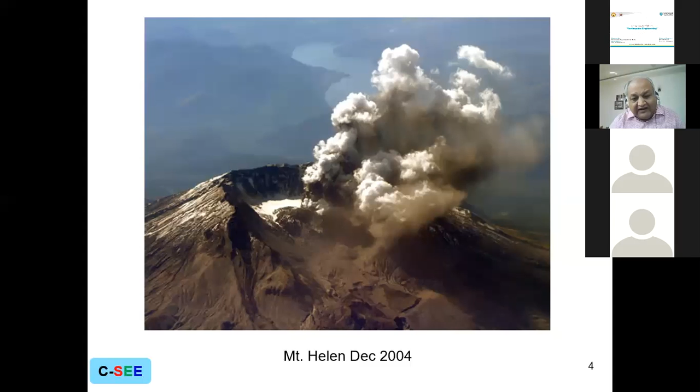Now the question arises: how do we carry out the design of buildings to resist earthquakes? Of course, we can't stop the earthquake from occurring, but we can certainly take precautions so that our buildings remain safe and the people inside the building are also safe.

There are essentially two types of design philosophy. One is the prescriptive design, which we have been following for several decades, and the new philosophy called performance-based design. These two philosophies are two opposite poles, North Pole and South Pole. In performance-based design, the code only specifies an acceptable level of protection against structural failure under extreme load, and how to achieve it is left to the designer. In prescriptive design, the code specifies what to do and what not to do.

For example, what should be the minimum size of the column, what should be the minimum size of the beam, what is the minimum reinforcement in a column, what is the maximum reinforcement, minimum spacing of reinforcement, maximum spacing of reinforcement, and so on.

So everything is prescriptive. It specifies what exactly you have to do, what you are not supposed to do. The problem with the prescriptive design is it may be either oversafe or sometimes undersafe. But you have less responsibility because you are following the code, and the code says do this, do this, do this, and don't do this, don't do this, don't do this. So the entire responsibility lies with the code in this case.

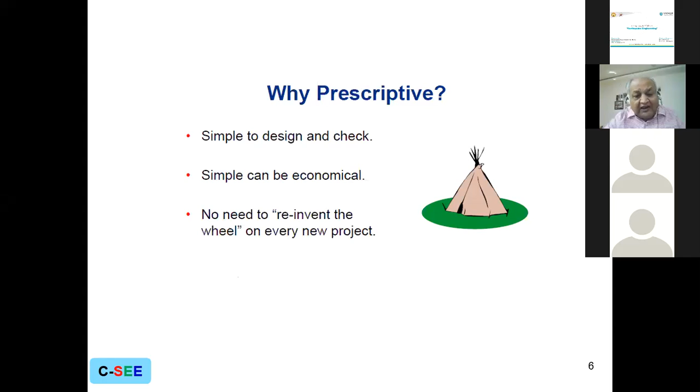What is the problem with the prescriptive design? The problem is it leads to loss of rationale and loss of ability to improve upon it. Loss of innovation leads to loss of economy, and loss of rationale can also lead to loss of compliance.

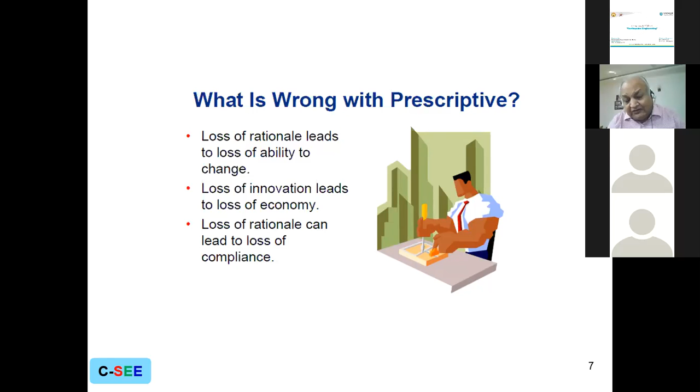Because nowadays, especially if you look at the current IS 1893 earthquake code, part 1, as well as 13920, there are many clauses which are very difficult to understand, very difficult to follow, and therefore there is a loss of compliance. So people have developed their own understanding, saying we'll do it like this, and they go ahead with it, and it is approved, knowing fully well that it does not really comply with these codal requirements. But what to do? If the codal clauses are irrational, you have no option.

Now, performance-based codes. ACI 318 code and the Eurocode 2 are quite close to performance-based code, but not exactly. Now, what is involved in a performance-based code? There are three parameters which you have to understand.

One is the performance index. The code is supposed to specify a performance index, and then how to verify the performance and how to evaluate the performance. So these are the issues. That's why the performance-based codes are not fully available even today. They are in the conceptual stage, quite advanced, but not fully available so that people can use it in the real sense.

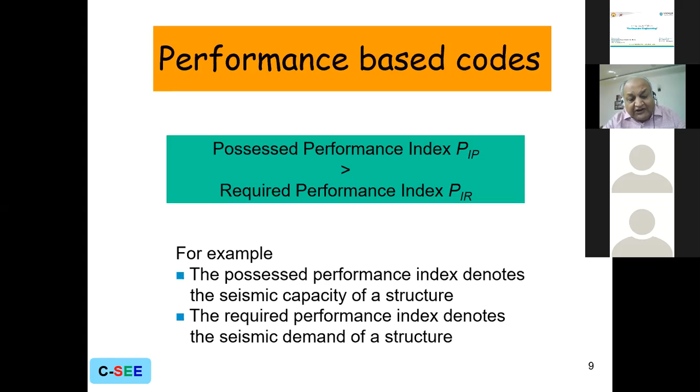In a performance-based code, it is important that the possessed performance of the building should be more than the required performance of the building. It's called required performance index, PIR, and possessed performance index, PIP. For example, the possessed performance index denotes what is the seismic capacity of a structure, and the required performance index denotes what is the seismic demand of a structure.

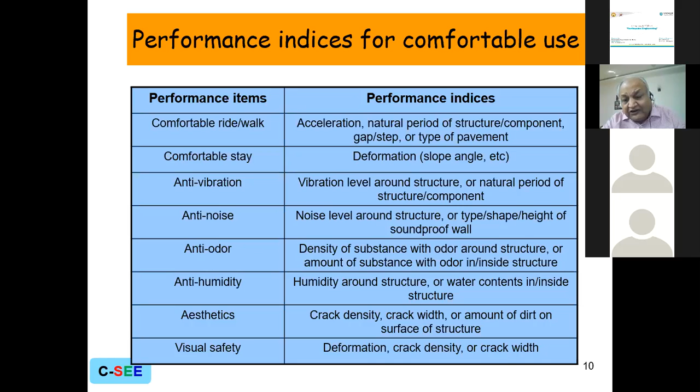Performance items: comfortable ride, walk, comfortable stay, anti-vibrations, anti-noise, anti-odor, anti-humidity, and on the right hand side in this table I have shown performance indices. For a comfortable ride or walk, acceleration and natural period of the structure component have to be under control. For comfortable stay, lateral deformations or story drift should be under control. Similarly, all the parameters are specified.

Now there is another limit state called damage control limit state. In a damage control limit state, damages to plastic hinge members are within the repairable limit. Non-hinge members do not yield, and members do not fail in shear. If you don't want a brittle failure, everybody knows that a shear failure is a brittle failure.

So we don't want shear failure. We want that the failure should be a flexure failure, and the members are not supposed to develop plastic hinge. That is, non-hinge members should not yield, meaning they should remain elastic throughout.

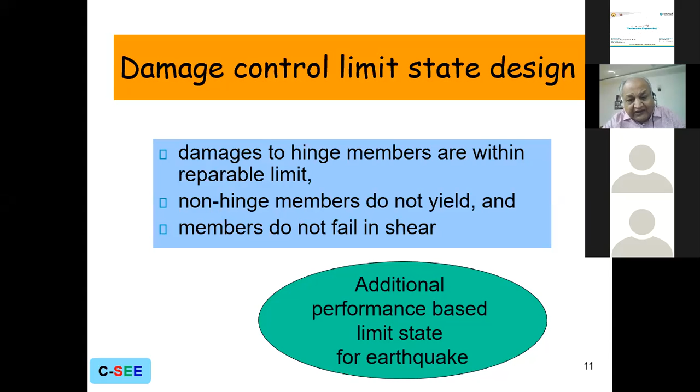What is wrong with the performance standards? Quantitative criteria are sometimes difficult to develop, and often difficult to achieve consensus. If there are two different designers talking about the performance standards, they may have two different views. Then evaluation—how to evaluate the performance—that is the biggest question.

Measurement is the key. How to measure the performance? It is essential to find a way to measure analytically or experimentally a meaningful quantity. What is the design criteria? The design criteria is that the structure must be able to resist all expected and probable loads on the structure safely during its entire design life.

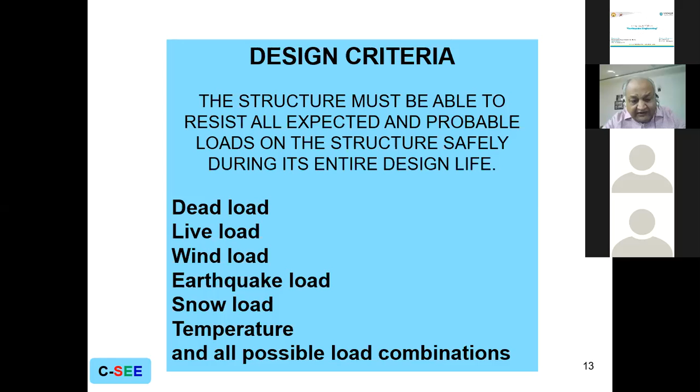Various loads I have specified here and the combinations. The present approach is to carry out elastic analysis and magnify the member forces by partial safety factors to get the forces at collapse. So you carry out elastic analysis and get the bending moment, shear force, etc., and from there you get the factored bending moment, factored shear force by multiplying by some load factor, 1.5 or 1.2 or something else. What does it mean physically? It means physically that the entire building is going to plastify simultaneously.

Because you are taking the entire building to plastic hinge by a single factor, 1.5 or 1.2, it means simultaneous plastic hinging in the entire structure, which is a highly improbable situation. That is the flaw with it.

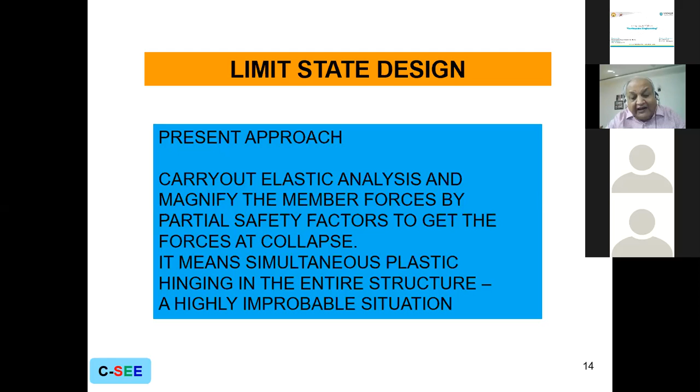Whereas what the code is saying is that you take the elastic forces and multiply by certain factors. That means all the hinges in the entire building, red color and yellow color, form simultaneously, and then the building may collapse or remain elastic depending upon the level of the lateral forces.

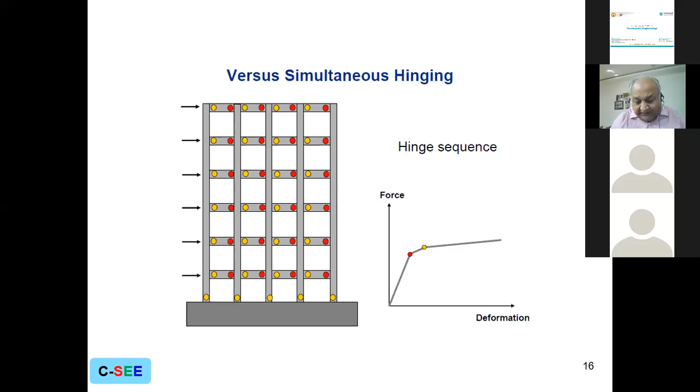The problem is that to tell the common designer or an average designer how to do this distributed plastic hinging, for which he has to carry out a non-linear analysis, would be very, very difficult because the maturity of the average designer is not that much, not only in India, but even in Western countries like Europe and America. So it's a universal problem right now, and that's why everybody is following the simultaneous hinging approach rather than the distributed plastic hinging approach.

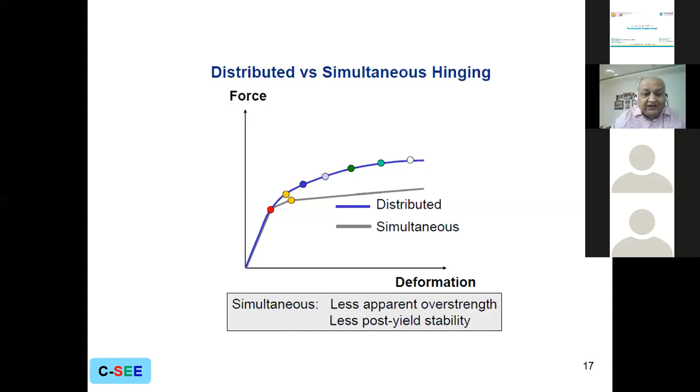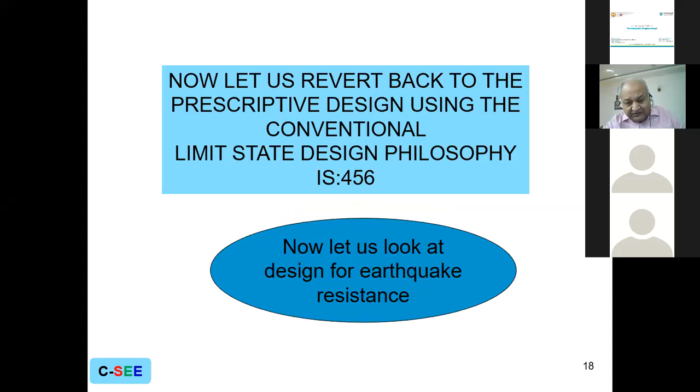Now let us revert back to the prescriptive design using the conventional limit state design philosophy as specified in our IS 456 code. Now let's look at the design for earthquake resistance.

What is the design philosophy? We try to divide earthquakes qualitatively into three categories: minor earthquake, moderate earthquake, and severe earthquake. In a minor earthquake, non-structural damage will occur to the building. In a moderate earthquake, which may occur once in 20 or 30 years, there may be minor structural damage which can be easily repaired. Severe earthquakes occur once in the lifetime of the building, maybe once in 100 or 200 years, and there may be major damage, but the building frame should not collapse.

The intention here is that let there be damage to the building, so we don't care about the building, but we do care about the people occupying it, and they should come out safely. So that is the design philosophy for earthquake resistant design.

Now, those who have seen the latest 2016 code, they have removed this design philosophy from the preface. I don't agree with this, why they have removed it. I don't know why, but they shouldn't have done it, because this is still a widely accepted worldwide design philosophy for earthquake resistant design.

There are three kinds of earthquakes qualitatively: small, moderate, and large. In a small earthquake, the controlling factor is deflections, provided by enough stiffness in the building. In a moderate earthquake, where there can be only minor structural damage, the controlling parameter is strength of the members. In a large catastrophic earthquake, where we want that there should not be any collapse causing loss of life, we allow the structure to enter the inelastic range and absorb energy by providing ductility. So in a small earthquake, the controlling parameter is stiffness; in a moderate earthquake, it is strength; and in a large earthquake, it is ductility.

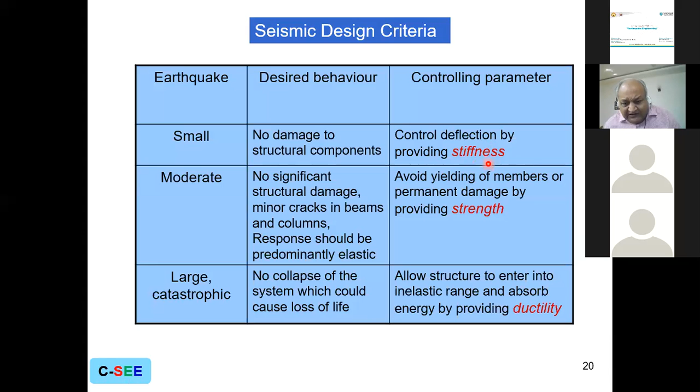So this is stiffness, this is strength, and this is ductility.

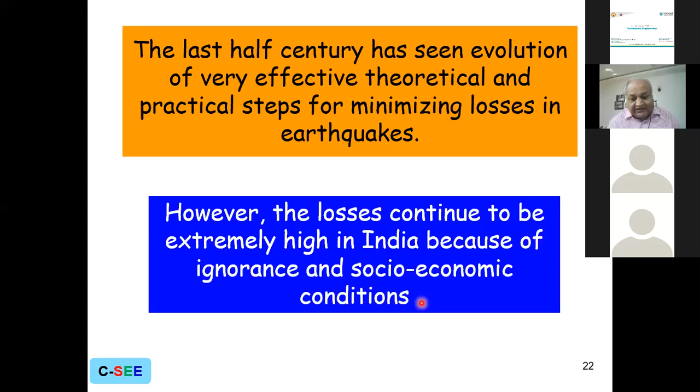The last half century has seen the evolution of very effective theoretical and practical steps for minimizing losses in earthquakes. However, losses continue to be extremely high in India because of ignorance and socio-economic conditions. What does this mean? The maximum losses occur in remote areas of the country where traditional stone masonry and poor construction practices are prevalent.

In the past, in hilly areas, timber or bamboo framed buildings were built, minimizing losses. That was the practice developed by our ancestors. However, deforestation and socio-economic factors changed the building materials, design practices, and construction practices, leading to greater losses.

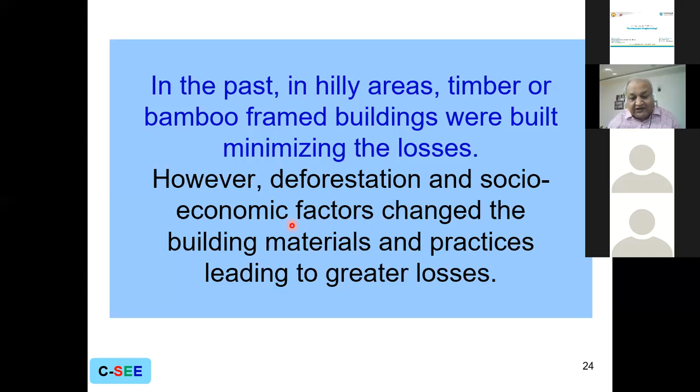Now everybody wants a pakka house. They think that if somebody lives in a timber or bamboo house, they are very poor and don't get social standing. Therefore they are forced to switch to masonry or RCC buildings, which are much more vulnerable to earthquakes than these lightweight buildings.

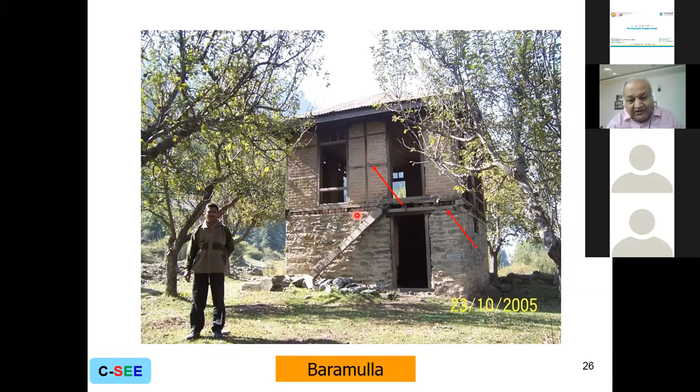They provided beautiful wooden trusses with all the members interconnected so that the building remains safe during an earthquake. This photograph is again taken from Baramulla.

Now you can see our latest buildings, or huts, in the hills. This is stone masonry with no bond; they are not even using mortar because they are so poor, they can't afford it. Look at the roof—it's built of slate, a very heavy material. If an earthquake occurs, because there is no bond, these walls will fail and collapse, and the roof will fall on the people inside the hut. That is the reason why, because of the lack of bond and interlocking, when there is an earthquake in the hills, you always read about high casualties. These are the buildings causing that casualty.

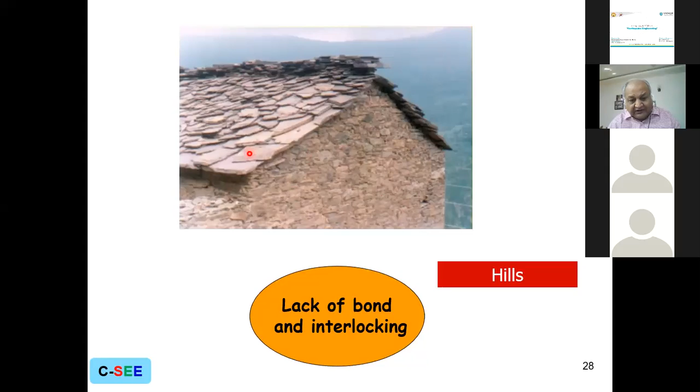Let us look at some of the typical damages during earthquakes all over the world.

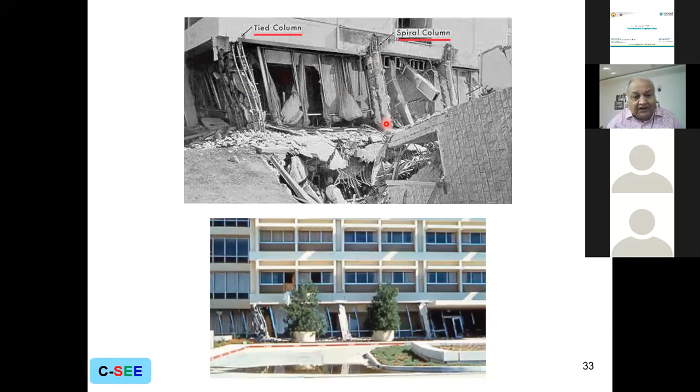This was the first floor, which has gone down. So this was the open story, and this is the elevation of this same open story. This frame has gone down, and you can see here somehow by accident this column happened to be a tied column, and the inner column happened to have a spiral column. There is no reason why one was made a spiral column and the other a tied column with lateral ties. But during this earthquake, the tied column is badly damaged, whereas the column with spiral reinforcement is intact. So in a single building, this is a very beautiful slide which shows that the behavior of a spiral column is very good during an earthquake as compared to that of a tied column.

This is a failure in a building in 1999 in Taiwan, the soft story failure. This building collapsed on the adjoining building. The adjoining building was all right, but because of the earthquake and soft story, this building collapsed on the other building, so both buildings are gone.

Another building from the same 1999 Taiwan earthquake - I can see here in the middle bay, all the beams have failed. It is a beam-column joint failure. Otherwise the whole building is intact, but because of this beam-column joint failure, the entire building is gone. It has to be demolished.

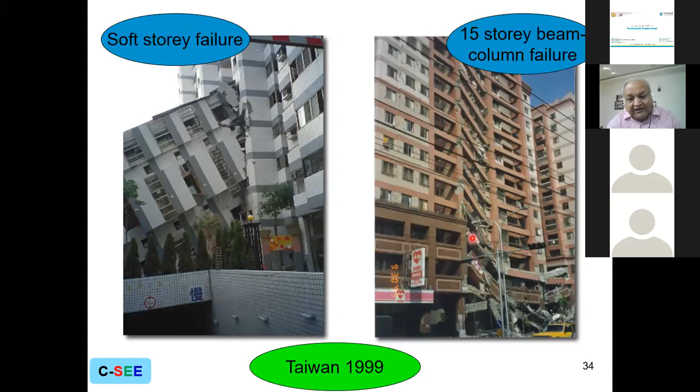Torsion in buildings is a single factor responsible for collapse of almost 90% of buildings all over the world. Torsion means our building is irregular. If you look at the classification given in IS 1893 Part 1, all buildings which are irregular, either in plan or elevation or both, introduce torsion in the building and are responsible for the collapse.

How are they responsible? The purpose of torsion is to increase the forces in the building, and the increase in lateral force is not much, about 15 to 20% only. So most people, because the architect wants an unsymmetrical building, say okay go ahead with the unsymmetrical or irregular building, and I will provide additional forces of 20% or 25%, and think that the building will be safe. That's a very, very wrong concept.

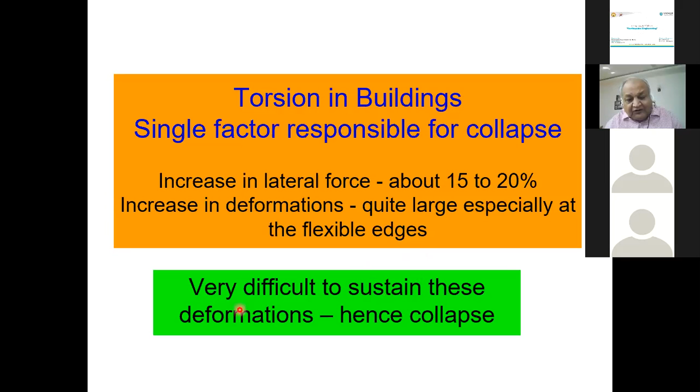In torsion, the increase in lateral force is not critical. What is critical is the increase in deformations, in deformations in concrete. You have concrete columns and beams everywhere, and because of torsion there is an increase in lateral strain in the columns and beams, and concrete cannot bear that kind of strain. Once the strain exceeds the permissible limit in concrete - more than 0.35% - as soon as that limit is exceeded, the building will collapse. It's very difficult to sustain these high deformations, that's why there is a collapse.

This is again a building from Gujarat, Ahmedabad - or Bhuj - and you can see here that only the lift core remains and everything else has gone down. This is because of the torsion in the building.

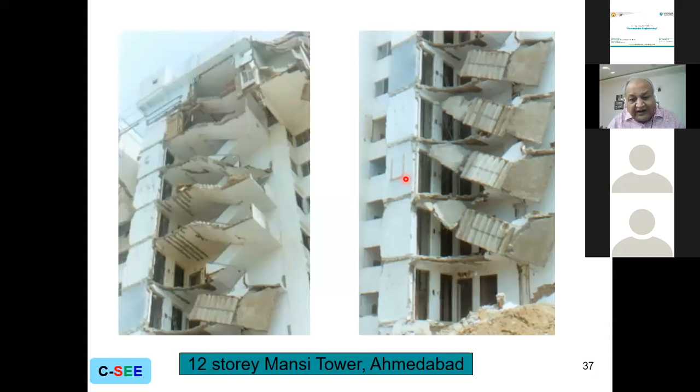This is Mansi Tower - the adjoining block collapsed, and look at what happened to the staircase. Again, torsion and soft story in this particular building from the Gujarat earthquake. Same building again - you can see clearly there is a torsional mode.

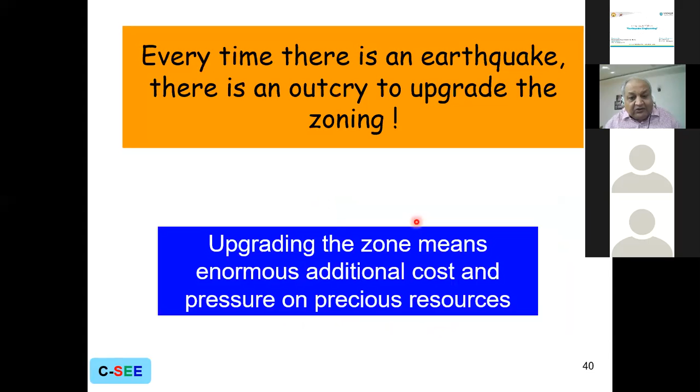What happens is that every time there is an earthquake, there is an outcry to upgrade the seismic zone. This is what happened after the Gujarat earthquake - Zone 2 in Bombay was increased to Zone 3, and Zone 1 was increased to Zone 2. There was no logic why these zones should have been increased. Upgrading the zone means enormous additional cost and pressure on the precious resources of the country, and it doesn't solve the problem because the problem lies somewhere else. Upgrading the zone is not a solution.

What is the solution? The solution is better planning, appropriate material, workmanship, and detailing. That's what is required - that means more pressure on the designer so that they are more careful in how to design the building. The key is to provide continuity, redundancy, and ductility in the building.

You have to provide ductility so that you have reserved energy in the structure. Projections and suspended parts should be minimized because they increase vulnerability to vertical accelerations.

You have to be careful about the non-structural elements and foundation, which should be interconnected. Use raft foundation or piles, and make sure you have the tie beam connecting all the pile caps.

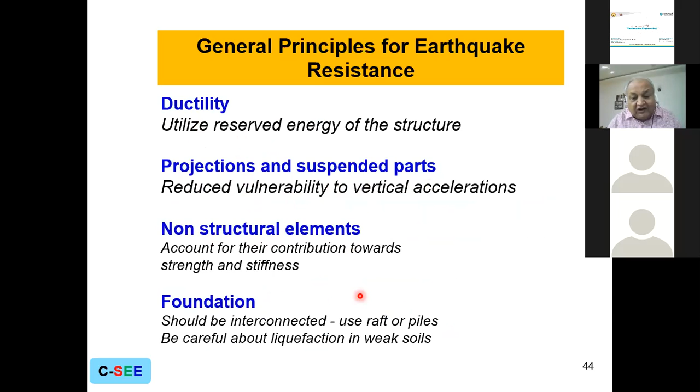So what is the objective of IS 1893 code? To provide lateral forces for earthquake depending upon the seismicity of the area, characteristics of the structural system, materials, etc.

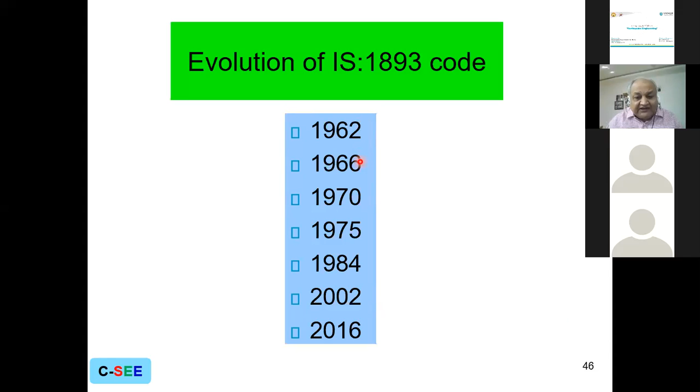Now, how do you analyze the building? There's the seismic coefficient method, the response spectrum method or dynamic/modal analysis, and time history analysis, which is the third method. We mostly use either the first or second, but time history method is still not included in the IS 1893 code.

That's where I have a problem with pushover analysis as well as other non-linear time history analysis. If the code even today is not able to specify how to carry out linear elastic time history analysis, and they have not incorporated it fully in IS 1893, yet now they are talking about pushover analysis or other nonlinear methods or energy absorbing techniques. So I don't know how they go together.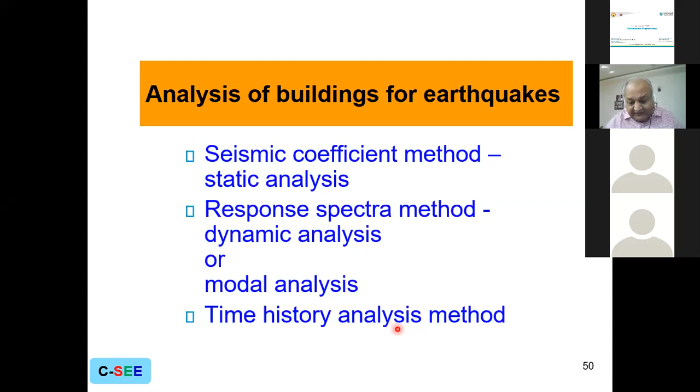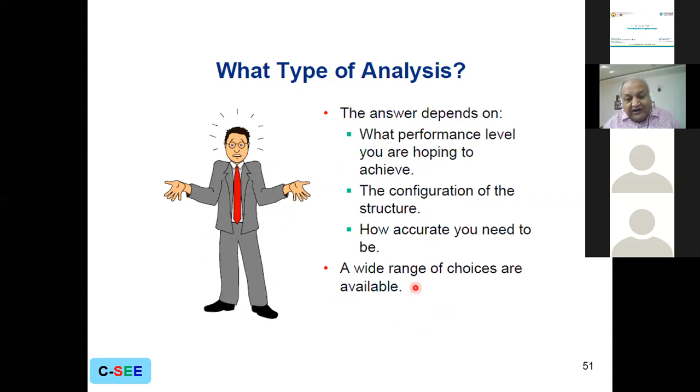The question arises: out of these three analyses, which should I carry out? The answer depends upon what performance level you are going to achieve, the configuration of the structure, how accurate you need to be, and a wide range of choices are available.

It is a single degree of freedom system. If we reduce our multi-story building to an equivalent single degree of freedom system, this is a portal frame related to lateral displacement. This is another mathematical model with mass, damper, stiffness, resting on frictionless wheels so it can move back and forth. This is approximate modeling, and this is the equation of motion.

m times x double dot plus c times x dot plus k times x is equal to minus m times y double dot, where y double dot is the ground acceleration.

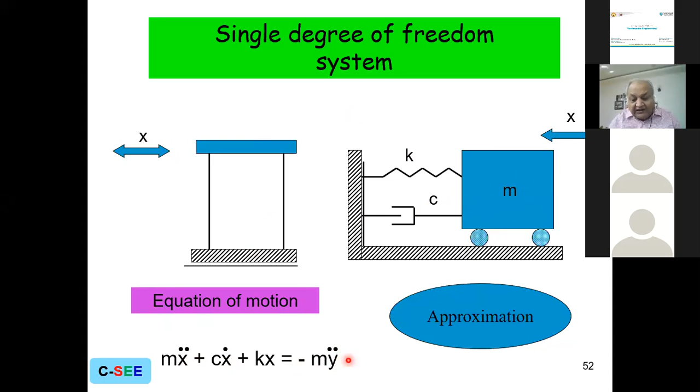So the response of a single degree of freedom system, having a given natural period of vibration or natural frequency and viscous damping, we need to calculate the absolute maximum displacement, velocity or acceleration when subjected to a given ground acceleration.

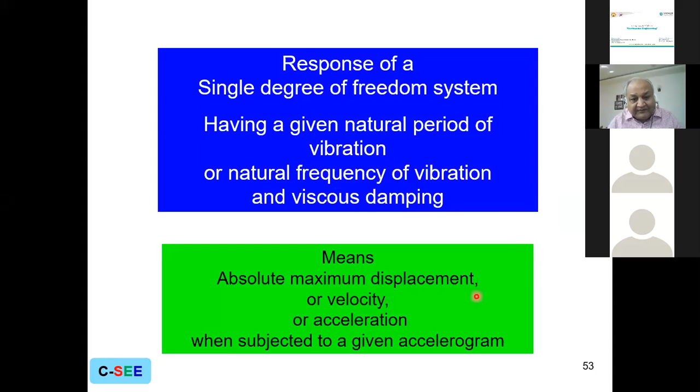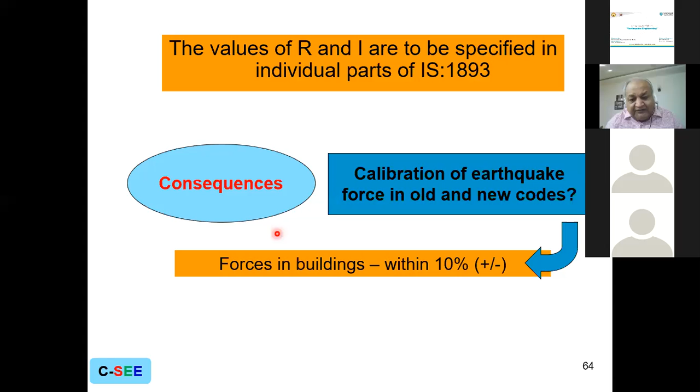So these are the consequences. Calibration of the earthquake force in the old and new earthquake code. I will skip this part.

Now, where is the point of application of the earthquake force? You have a building, so at what point does the earthquake force act on the building? The earthquake force acts through the center of mass at each floor. So you have a static force you apply through the center of mass at each floor.

The eccentricity of the applied force is given by the following equations given in the earthquake code. There are 2 sets of equations, EDA and EDB. ED means design eccentricity, so design eccentricity A and design eccentricity B. The formula for A is 1.5 times E plus 0.05 B, and the other one is E minus 0.05 B.

So what is the physical significance of these 2 equations? In a building, on any floor, one side may be more rigid as compared to the other side. So we say the rigid side, and equation 1 governs the rigid side of the building, whereas equation 2 governs the flexible side of the building. What does it mean actually? How does it govern? Let's understand what is E.

E is the eccentricity between the center of rigidity and center of mass at each floor. CR is center of rigidity and Cm is center of mass. There is another definition of eccentricity: it is the eccentricity between the shear center and cumulative center of mass at each story. And what is B? B is the width right angle to the direction of the earthquake, the width of the building. The factor 1.5 represents dynamic amplification factor and the factor 0.05 represents extent of accidental eccentricity. I hope this part is very clear.

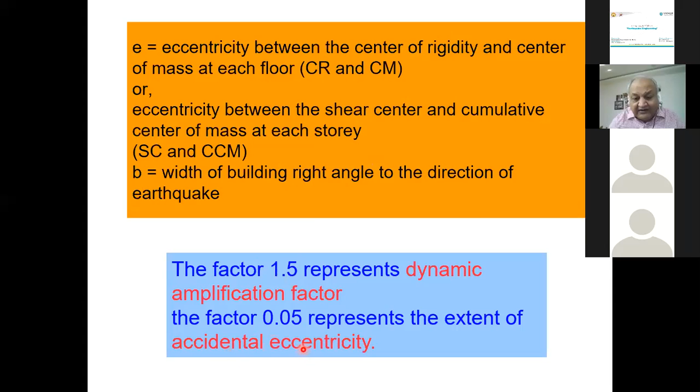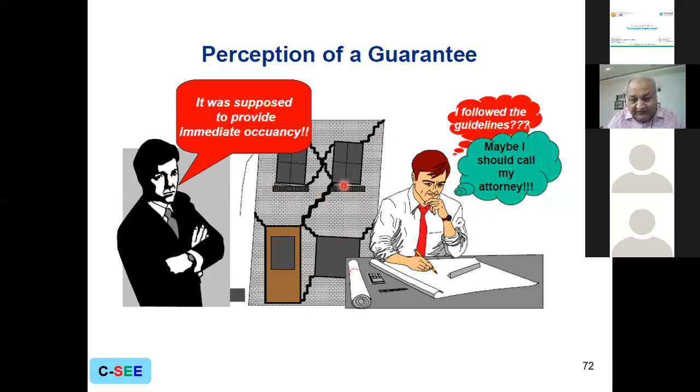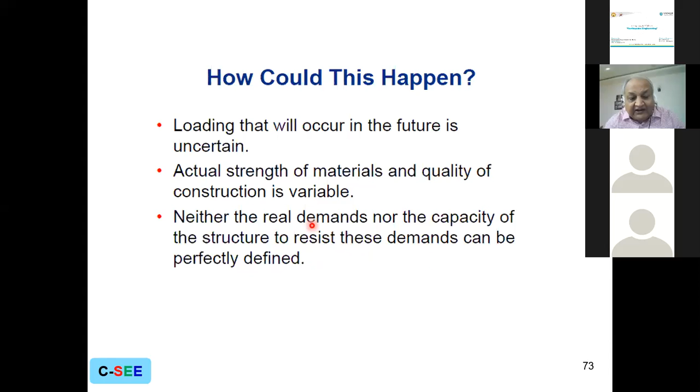How could this happen? The loading that will occur in the future is uncertain. The actual strength of materials and quality of construction is variable. Neither the real demands nor the capacity of the structure to resist these demands can be perfectly or accurately defined. Earthquake force is a highly unpredictable, unknown force due to lack of data, depending on magnitude, frequency content, duration, and peak ground acceleration.

Now let's look at the detailing of the reinforcement aspect. What is the philosophy of detailing of reinforcement? Ductile failure, that is flexure failure, is desirable. Out of the two failures, we divide them into two categories: shear failure and flexure failure. Shear failure is a brittle failure - it fails suddenly, gives no warning, and therefore must be avoided. Flexure failure is preferred, although we don't want any failure at all. But if there has to be a failure, let it be flexure rather than shear - a ductile failure, which is desirable because it gives sufficient warning to take corrective actions in the building.

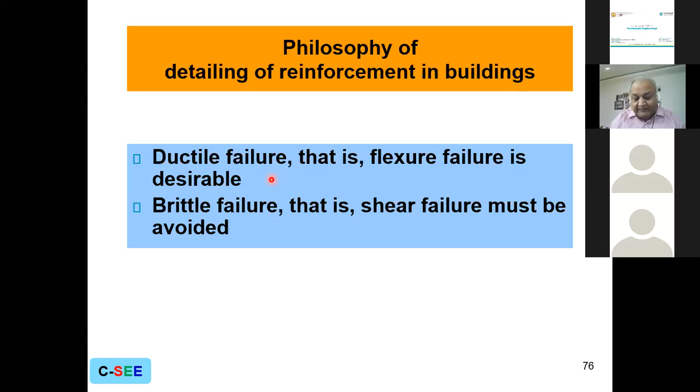What is the option of the designer? Depend heavily on the reserve strength, that is nonlinear energy, that is ductility. For that, I have to consult IS 13920-2016 code. Let me give you a conceptual idea about ductility.

This only means it may become very expensive because I am designing my building for the maximum possible earthquake force in its life, which may occur, which may not occur. I am designing for a higher force - I am increasing my cost with the so-called advantage that it won't fail, it will remain elastic throughout.

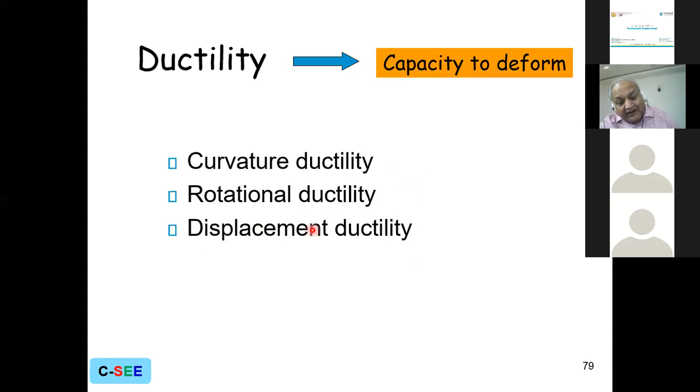I have carried out a lot of nonlinear analysis in buildings, and I find it is difficult to achieve even a displacement ductility of 3, because the structure fails, it collapses.

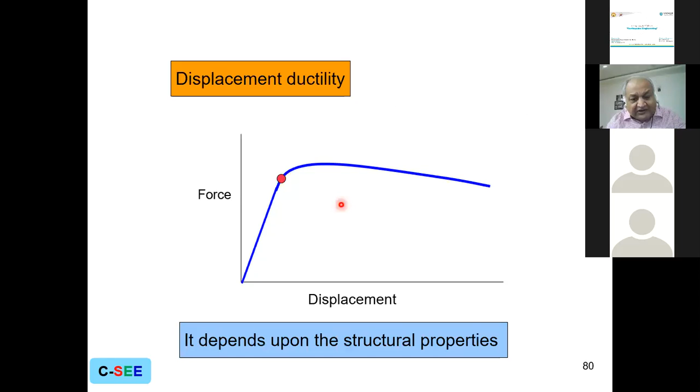In India, if you see, almost one building collapses somewhere in the country, maybe Delhi. There are so many cases happening, reported on TV almost every day, in spite of so much advancement, so much material technology advancement, so much computer modeling, and so on.

We are supposed to refer to these codes for the detailed detailing, and don't forget this IS 456 code, which has to be followed. So you have to satisfy all these requirements, this code and this code.

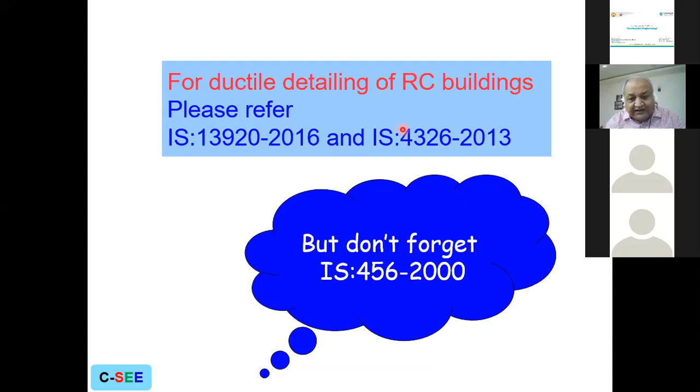Now, what is the idea of detailing of reinforcement in different elements? The idea is to provide confinement of reinforcement, because the concrete is in a triaxial situation, that is, it is being confined from all directions. There is an increase in its ultimate strain or the failure strain.

That's called capacity design. In capacity design, you have to identify the probable locations of plastic hinge in all the structural elements, and then make sure that the hinge will form only at that location and not anywhere else. That's the whole purpose of capacity design - you identify the probable locations of plastic hinges.

How do you define the probable location of plastic hinges? You have to carry out a nonlinear analysis. Now, when you carry out nonlinear analysis, the problem is how do you model your beam? How do you model your column? How do you model the beam-column junction? How do you model the steel? How do you model the reinforcement and so on? How do you model the shear reinforcement? These are questions which are still not answered.

So it is very easy to talk about capacity design. It is very easy to talk about pushover analysis, but there are problems. There are serious issues involved in how to model a building for nonlinear analysis.

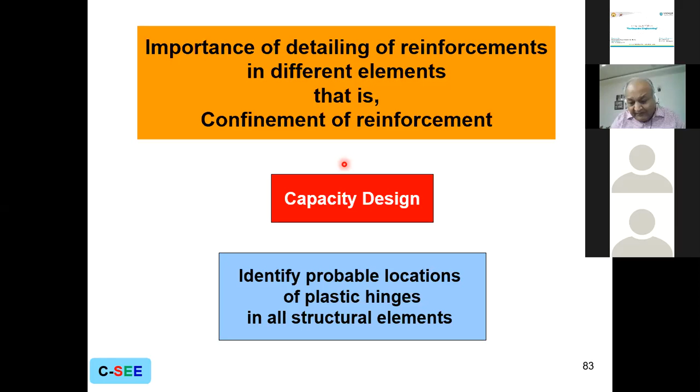So we'll discuss this a little more in the subsequent slides.

A knowledge of the plastic theory is required to understand and appreciate the concept of plastic hinges. As I said, the biggest issue is how to model a building for nonlinear analysis, and that is still open to question. There are several models available and several schools of thinking. Everybody comes up with a different model, and if you change the model slightly, the results are totally different.

So if you change the input parameter slightly and your results are totally different, then how do you trust them? Whom do you trust? And if you can't trust the results, how can you think about carrying out a nonlinear pushover analysis or a design based on nonlinear plastic hinge analysis? So it is good that people are doing nonlinear analysis for academic purposes, but when it comes to real life, we still have a lot of problems.

There are still many issues. How do you make sure that the concrete you have built in real life at site—how do you ensure the quality of that particular concrete? Even today we don't have any foolproof technique to tell us where the honeycombing or segregation is inside the concrete, unless there is a failure.

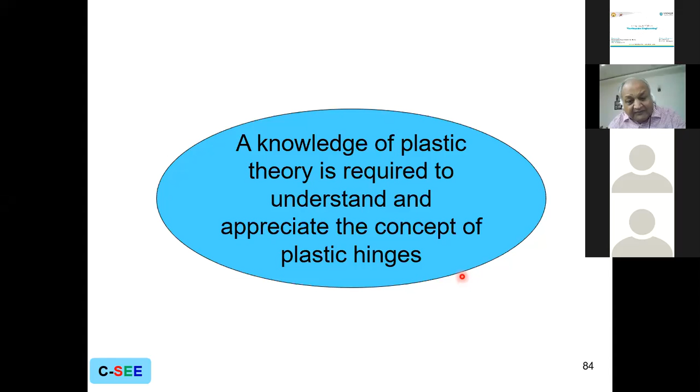Then we talk about strong-column weak-beam proportions. That means at any joint, in both the vertical planes x-x and y-y, the summation of the moment capacities of the columns must be more than at least 20% of the summation of the moment capacity of the girders. Sometimes in the latest code they changed it to 40%.

And I don't know how many of you are aware, in the draft code of the 2016 code, this factor was 1.7. That means the moment capacity of the columns should be 70% more than the moment capacity of the girders.

You know what happens—if you use that kind of value, even with 40%, the column sizes become very, very large, and most architects don't accept it. I am in touch with many designers in the Delhi NCR region and other parts of the country, in Bangalore or Bombay, and there is a complete feedback that architects don't want column sizes to increase that much.

So again, what happens? How do they bypass it? What do they do? They simply don't use this check.

Okay, they are not using this check. Again, there is a problem with the compliance of the codal specifications. People are building their buildings without this clause.

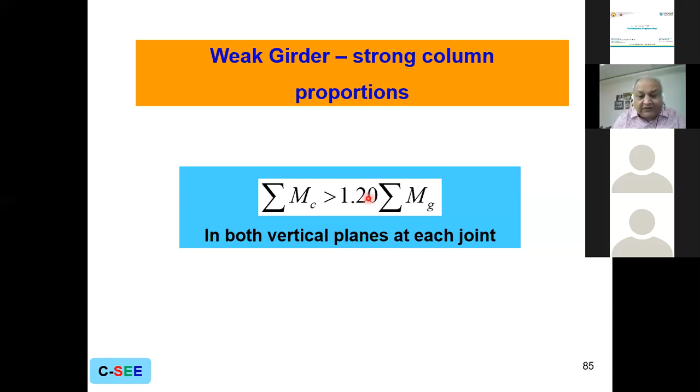Because if you go into panic mode, you increase by 1.2, 1.4, or 1.7 as was proposed in the draft. Just when the code was being finalized, somebody reduced it to 1.4 instead of 1.7. But even 1.4 is very high. That is the reason why people don't want to check this and make the columns bulkier, and they lose the workable space.

Now, concluding remarks. There is approximation in the concept of limit state design as per IS456 code. There is approximation in modeling and analysis of the building. There is approximation in computing design earthquake forces as per 1893 code. We need not be slave to the codes. Therefore, it is all the more necessary to use common sense, good materials, and very good workmanship. This is the key. Common sense, good materials, good workmanship is what is going to save your building from collapse.

Now I tell you, I visited a lot of buildings in Bhuj, around Bhuj, in almost 100-kilometer radius of Bhuj and Ahmedabad, after the 2001 earthquake. And I found that there are many buildings which did not collapse while the adjoining buildings collapsed. So how do you explain this?

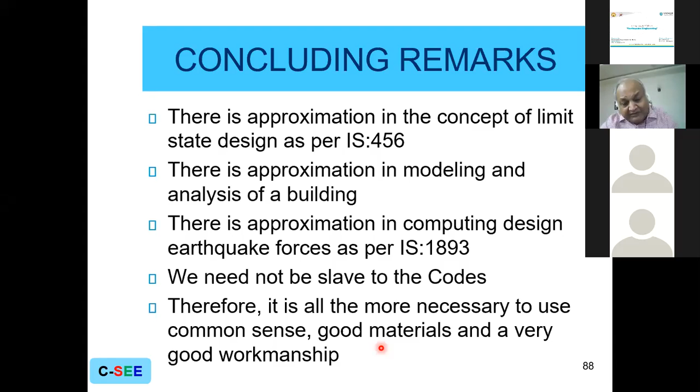Obviously, when we went into the detail, we found that the problem was with the material and workmanship. And that is the reason why those buildings collapsed.

Now, the Indian code writers appear to have a strong belief that the level of seismic hazard in India is same as that in Japan, China, or California in USA. You understand my point here? I'm saying the Indian code writers, especially after the 2002 code, I'm talking about this 2016 code and the revision which is being proposed now, they feel that the level of earthquake hazard in India is same as in Japan, China, or California. That's why with each revision, they keep making it more conservative and expensive.

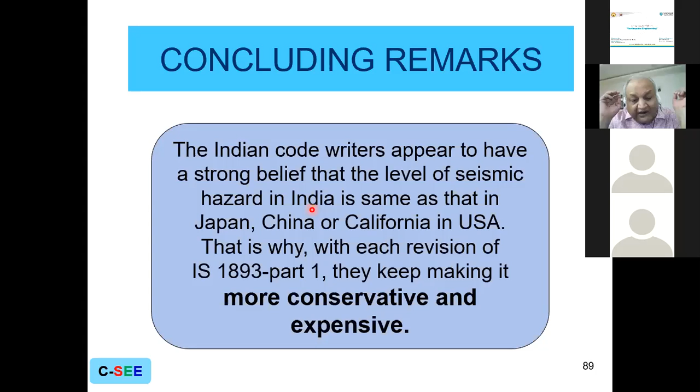How is it possible that the ductile detailing in seismic zone 3, 4, and 5 are identical when the level of hazard is quite different? Why do you have zone 3, 4, and 5? Because in zone 3, we are saying that the earthquake hazard level is very low. In zone 4, the hazard level is a little more. And in zone 5, the earthquake hazard level is even more. If the earthquake hazard level is different in these three zones, how come the ductile detailing is the same in all three?

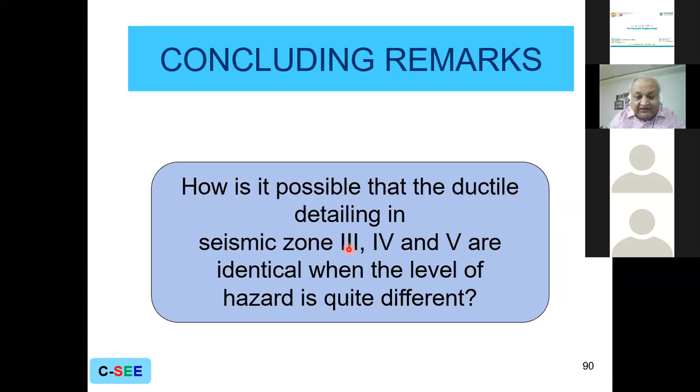In my opinion, the ductile detailing in zone 3 should be much milder as compared to zone 5, and same thing in zone 4. The question is, where is the evidence? Did we have a single failure of a building in zone 3 due to earthquake? No.

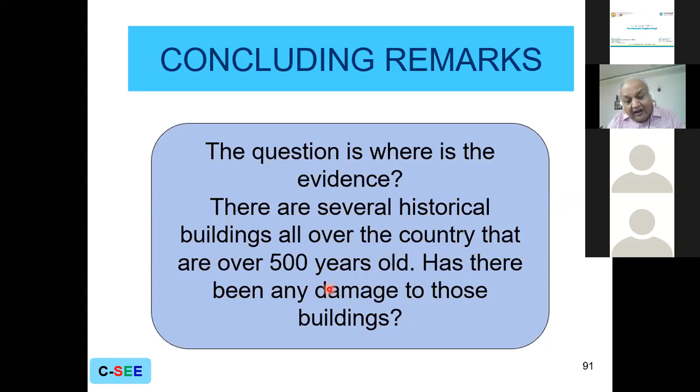There are several historical buildings all over the country that are over 500 years old. Has there been any damage to those buildings? If these buildings are standing for the last 500 years, that means we have only mild earthquakes, we do not have strong earthquakes like those seen in California or Japan and China. So that means there is no need to compare our base years, our activity level with those earthquakes, with those countries.

Our code writers are shy to provide logical commentary behind each and every clause. They should give it, but they are not giving it. The reason? They simply resort to copy, paste, and edit technology. They copy a clause from somewhere, one clause from somewhere else, and they put it together and edit, based on their belief. They think this is the way it should be. But there is no evidence to suggest that this is what is happening.

Another important thing is that the world is moving towards microzonation. I'm sure most of you are familiar with it. So what is microzonation? It means the seismic...

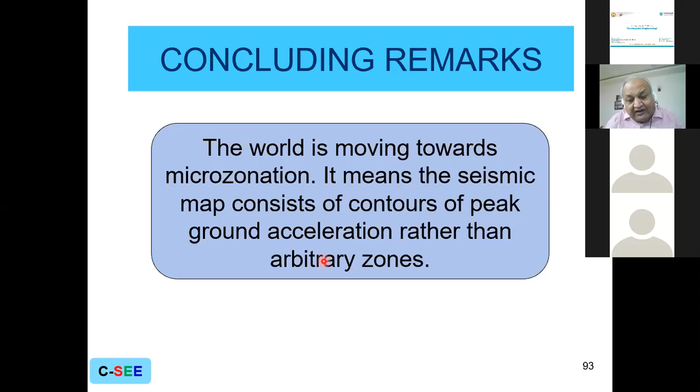In order to develop more logical designs, it is strongly recommended that they develop peak ground acceleration contours and move towards microzonation of the whole country. In that case, we will be able to come up with a more logical earthquake map and design, which will be easier to follow. Let's hope that one day our code part 1 will also have contours so that our design becomes more rational and economical. My advice to my students is they should think about every clause, and keep on thinking.

You should keep on thinking. The more you meditate, the closer you are to the truth, because there are many clauses which are very difficult to understand. The one way of understanding those clauses is that you think and think. So structural engineering is akin to yoga, where you keep on meditating till you understand the truth. Thank you so much.

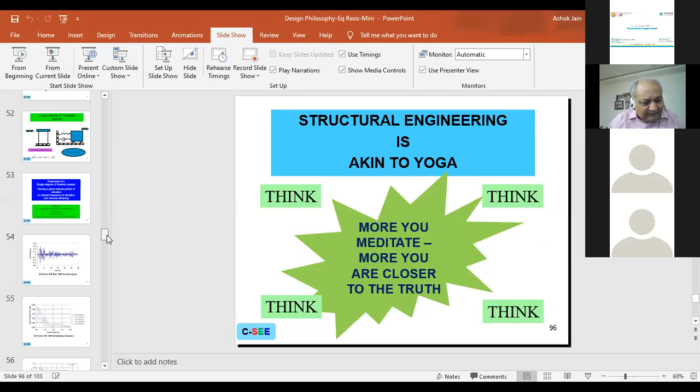Can you see my slide? Can you see my screen, please? Yes sir, it is visible. Okay, so what I'm showing here is this.

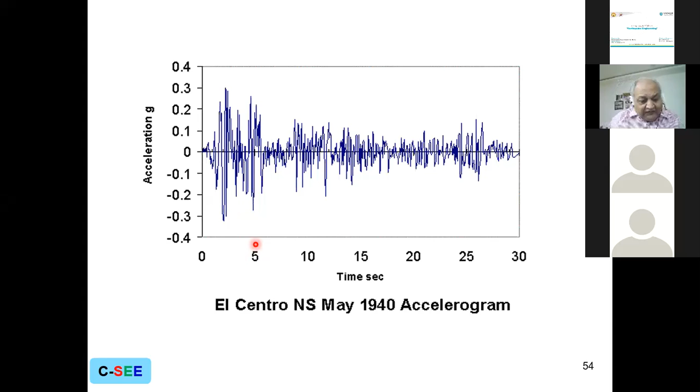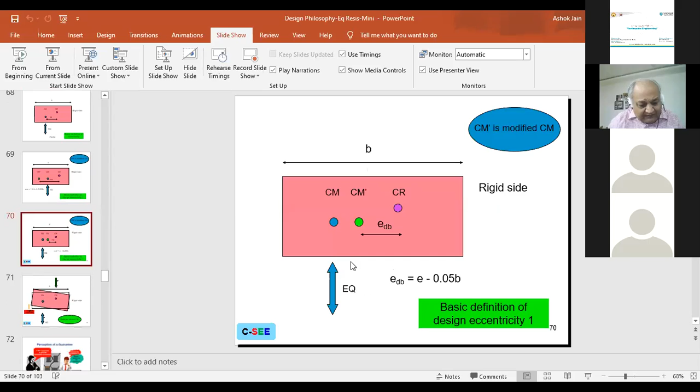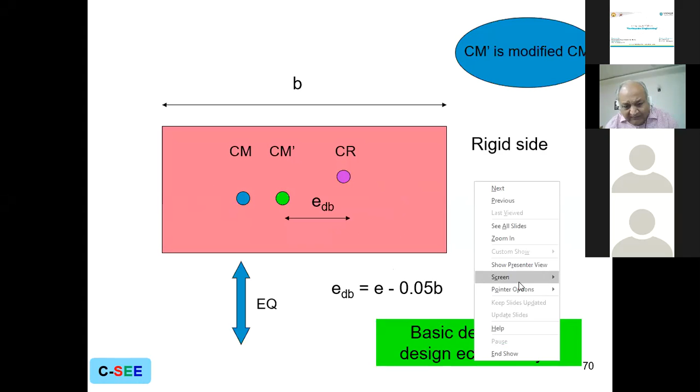If you see my discussion which I mentioned about this one, okay, so here is the center of mass, here is the center of rigidity. This is the actual, as per your calculation, center of rigidity, and here is the center of mass. Now whether you have mass eccentricity, or uneven mass distribution, or flexible diaphragm, it doesn't matter. Effectively, you have to calculate what is the center of mass on a given floor and what is the center of rigidity on that floor.

So whatever may be the cause of this irregularity, ultimately you need to calculate the location of center of mass and center of rigidity, and then use those two equations, EDA and EDB, which I told you. This is the actual center of mass and this is the modified center of mass because of equation EDB. So EDB is basically the distance between CM prime and CR. This is EDB. CR remains constant, it doesn't change, only the CM changes because of this equation.

This is EDA and this is EDB. So CR remains where it was originally, because CR is the center of rigidity of the building which does not change, cannot change. It's only the apparent mass which is changing.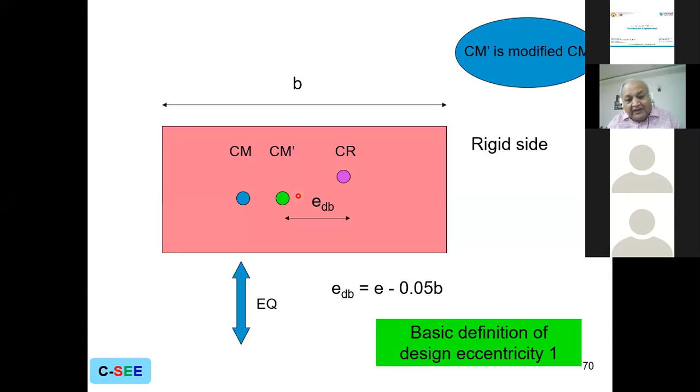So whether it is mass eccentricity or flexible diaphragm, the basic torsion remains the same. Here ultimately this is your CM, this is your CR, this is the reaction offered by the building, this is the force offered by the earthquake, and for equilibrium this force has to be equal to the reaction. So the distance between force and reaction, this eccentricity, is going to cause torsion. Chances are that concrete will not be able to sustain this deformation at the flexible end in the columns or beams, and therefore concrete will simply fail.

Sir, the next question we'll take up is: kindly tell about the acceptance criteria in performance-based design for seismically isolated RC buildings.

See, the point is that if you have seismically isolated it, that means you have carried out base isolation, right? How did you isolate? By base isolation. So once it is base isolated, you don't have to worry. The building is safe no matter what. That's the whole purpose of base isolation. Once you have isolated at the base level, no matter what is the earthquake, your building is always safe, it is always elastic.

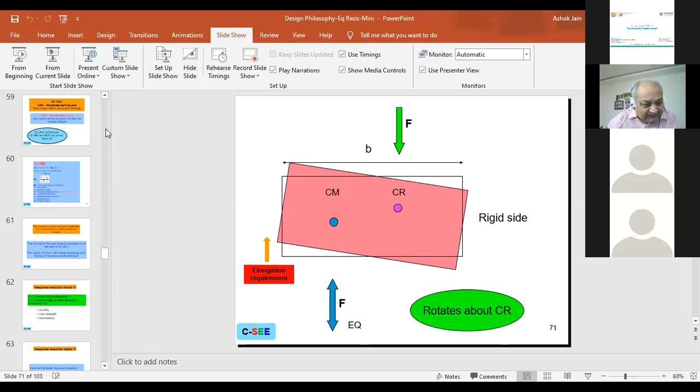See, in order to explain to the students what is Z by 2: you tell them that Z is coming from the spectral acceleration given in the code, which corresponds to MCE. And when you divide by 2, you get DBE. And further, if you divide by R, you get the design spectra, the design base shear. Now, if you delete the terms DBE and MCE, you can delete the term, but how do you delete the concept? This concept is coming from there only.

And when you look at any international code, whether it is ASCE code or Eurocode, they are using those terms, in fact with probability. DBE is still 10% probability of being exceeded in 50 years - that is how DBE is defined even in Eurocode EC8. And MCE is defined as 2% in 50 years, that's how MCE is defined in Eurocode, even in ASCE7. So those people are using the same definition even today, and they will continue to use it.

What is the logic for deleting this in our code? And remember, these definitions were deleted in the last meeting when the code was finalized. It was not deleted during the previous meetings in which there were a lot of discussions over the last 3-4 years. So suddenly somebody got a wave - maybe shear wave, I don't know - to delete those terms, and those were deleted. Similarly, minor earthquake, moderate earthquake, and strong earthquake, these terms were also deleted. The entire preface, which was about 8 or 9 pages, is now only 1 page.

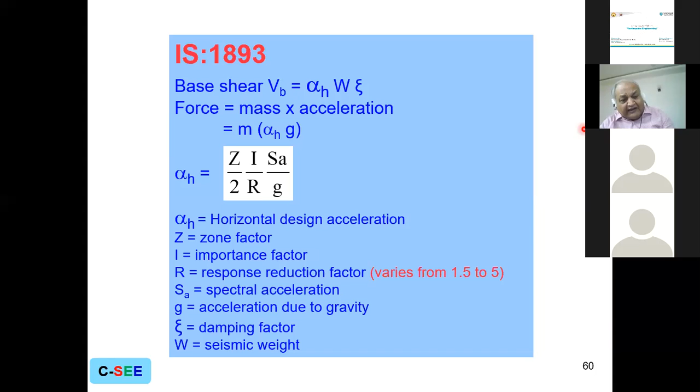No, the response reduction factor is something different altogether. Unfortunately, in our code, the R factor is totally arbitrary. When you say factor 3, 3.5, 4, 4.5, or 5, it's a purely arbitrary number. There's no logic behind it. But theoretically, you're supposed to carry out a nonlinear analysis with that kind of nonlinear behavior of the building and then develop the R factor. So R factor is not a function of irregularity, but of overstrength, redundancy, and ductility. These are the three factors which determine R.

The next question is, which design method should we generally follow practically? Whenever a newcomer starts designing, what methodology should they follow? As you mentioned, as you go deeper and deeper you come closer to your exact analysis, so one has to start with linear and then...

For all practical purposes, whether it's a 5-story, 10-story, or 20-story building, your linear analysis response spectrum method gives a fairly reasonable result, if you can ensure that your building is regular. Because, see, I told you why I'm not in favor of torsional behavior, why I don't want irregularity.

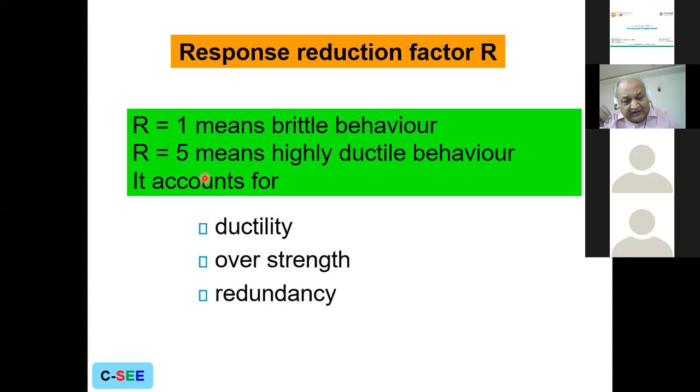I already explained this in these slides. This is the reason: at this corner there's going to be a column, right? And the column will be stretched because the building is rotating about the vertical axis. The question is, can the concrete in the column undergo this additional strain? Once it exceeds 0.35%, your column is gone, the concrete is gone.

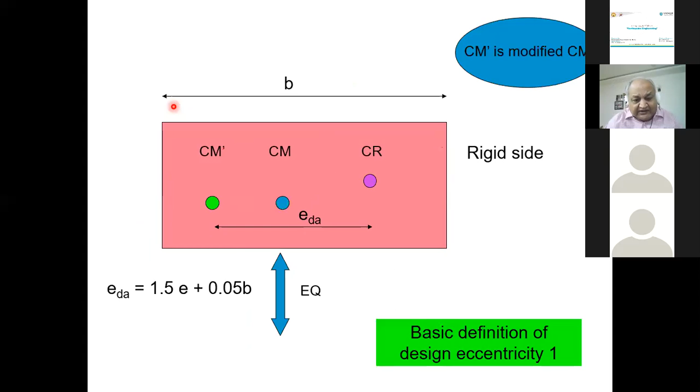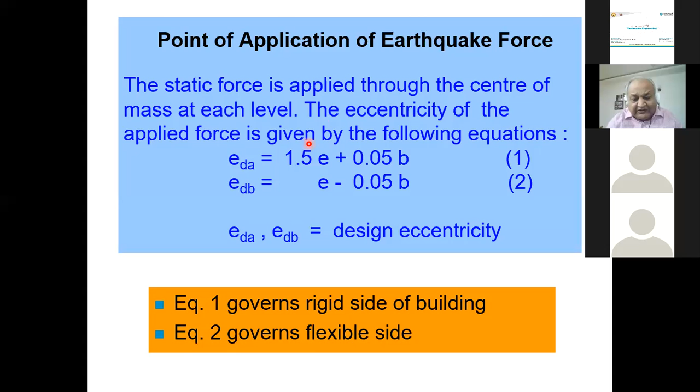So one thing you have to understand: when we talk about irregularity, what are we looking at? We are not looking at the magnitude of the torsional force. Unfortunately, when you carry out this analysis, when you look at this eccentricity, you're looking at the torsional force. But torsional force is not important. What is important is the torsional deformation, not the force.

I talked to a couple of designers, and what they say is, 'Sir, this increase in torsional force is coming out to 10%, I will increase it 20%. Now my building is safe and I can go for an unsymmetric irregular building.' The answer is no.

We should not be looking at the force, although our design method happens to be force-based. We calculate the force, multiply by eccentricity, get the torsion. We are looking at the force, but we should be looking at the deformation, not the force. Can your column concrete or beam concrete take this additional strain beyond 0.35%? The answer is no, it can't take it. That's why in all buildings that have collapsed, even in the Bhuj earthquake or in Ahmedabad, the failure was due to torsion, not any other reason.

So, elastic analysis, response spectrum analysis—forget about push-over analysis, forget about performance-based design. Those are good for research, for publishing papers. But as far as real buildings are concerned, go for linear elastic response spectrum analysis, carry it out seriously, and make sure your building is symmetric and regular. That's it. And make sure the quality of material and workmanship is of the highest possible standards.

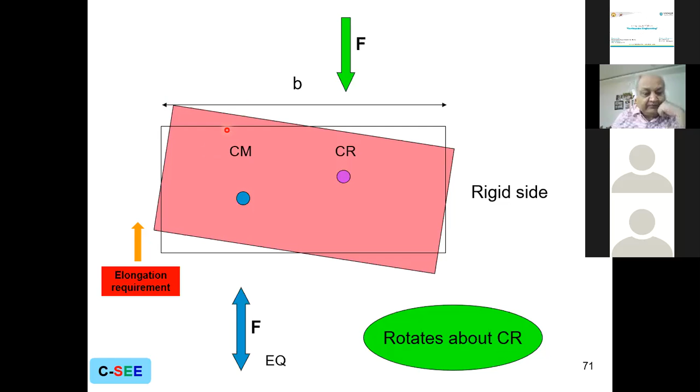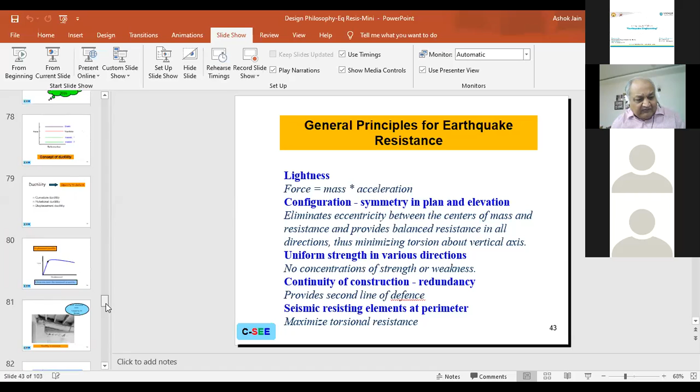So these are pure common sense—you look at the deformation, deformation is visible. So if those people could do this kind of wonders in those days, why can't we do it today with so much resources available to us? We are just creating unnecessary complexities in the structure.

They want to bring in—let me talk about one more thing. We're talking here about code of practice. What is the title of the code? It says code of practice for earthquake resistant design. What is the code? It is a code of practice. So whatever is being practiced in the field should be codified.

Okay, you should codify the code of field practices and put it in a code, not bring your research from your lab or your computers into the field. See what is happening? And everybody is facing the music.

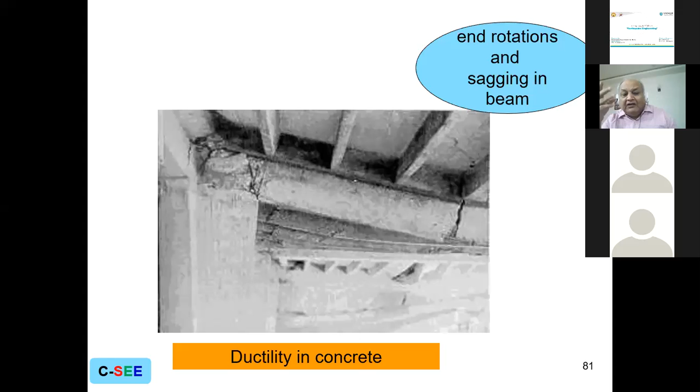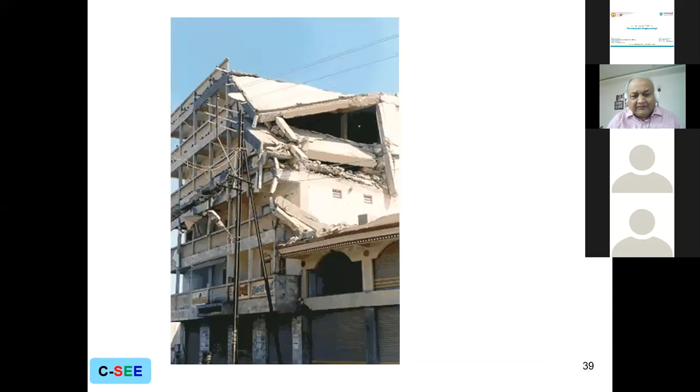That's what I'm saying, it is not in your hands. I showed you this slide in the beginning itself. This slide shows hinging at different locations at different times. The way the plastic hinge will form depends on the moment capacity of the particular section, and moment capacity depends on the bending moment and the reinforcement, the quality of concrete, the amount of reinforcement, and so on. The hinge forms at different locations at different times, which is not in your hand. The building has been built.

So a certain material has been used, a certain level of workmanship has gone into the reinforcement preparation, compaction, curing, and so on. So unless you know how to measure that quality of concrete at every location, how can you control or forecast the formation of the plastic hinge? You can't, right? That's what I'm saying.

Forget about performance-based design, forget about pushover analyses. It is good - I have been doing pushover analyses or non-linear dynamic time history analyses for the last 40, in fact 45 years. That's why I'm saying forget about those things. It's good for research, but it's not going to take you anywhere as far as the field is concerned.